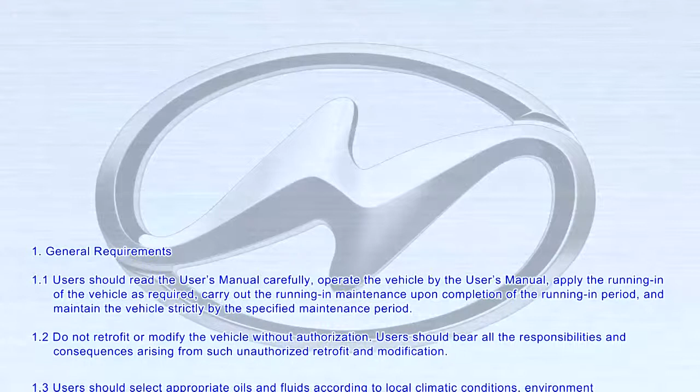period. 1.2. Do not retrofit or modify the vehicle without authorization. Users should bear all the responsibilities and consequences arising from such unauthorized retrofit and modification. 1.3. Users should select appropriate oils and fluids according to local climate, environment temperature, and road conditions. Conduct routine maintenance, elementary maintenance, and complete maintenance according to the intervals and the maintenance items required in the manual.

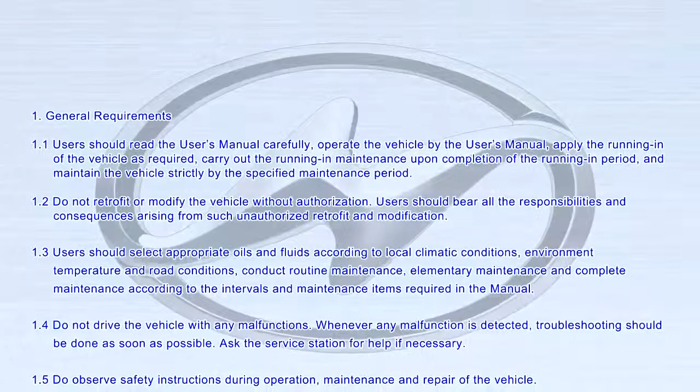1.4. Do not drive the vehicle with any malfunctions. Whenever any malfunction is detected, troubleshooting should be done as soon as possible. Ask the service station for help if necessary. 1.5. Do observe safety instructions during operation, maintenance, and repair of the vehicle.

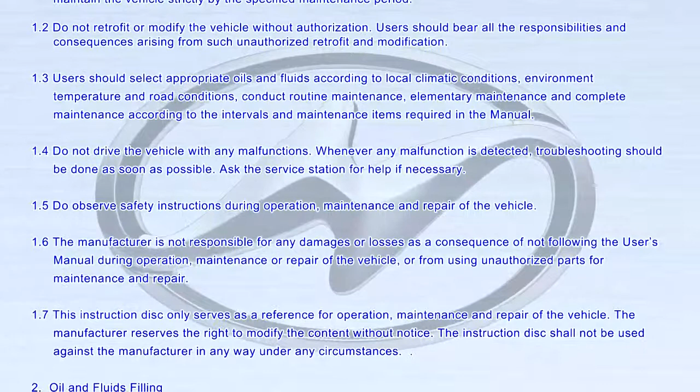1.6. The manufacturer is not responsible for any damages or losses as a consequence of not following the user's manual during operation, maintenance, or repair of the vehicle, or from using unauthorized parts for maintenance and repair. 1.7. This instruction disc only serves as a reference for operation, maintenance, and repair of the vehicle. The manufacturer reserves the right to modify the content without notice. The instruction disc should not be used against the manufacturer in any way under any circumstances.

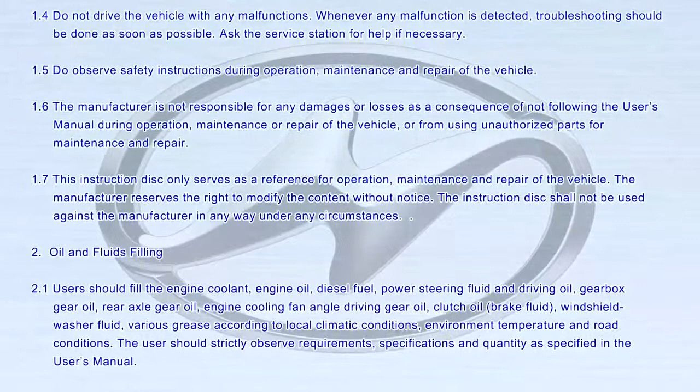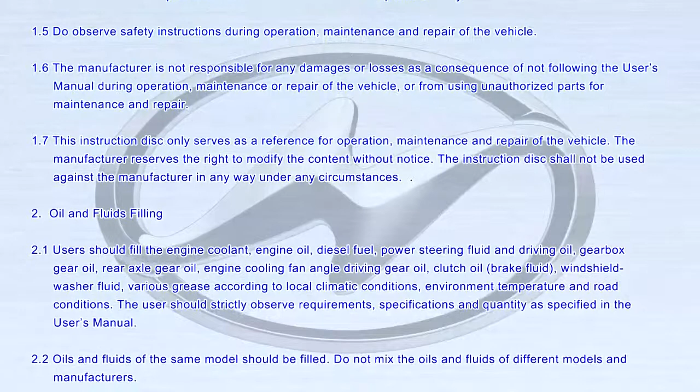2. Oil and fluids filling. 2.1. Users should fill the engine coolant, engine oil, diesel, power steering oil, gearbox oil, rear axle oil, engine cooling fan angle transmission oil, clutch oil, brake fluid, windshield washer fluid, various grease according to local climate, environment temperature, and road conditions. The user should strictly observe requirements, specifications, and quantity as specified in the user's manual.

2.2. Oils and fluids of the same model should be filled. Do not mix the oils and fluids of different models and manufacturers. 2.3. If water instead of specified coolant is used, a range of problems such as corrosion, damage to cylinder body, or reduced cooling effect may occur.

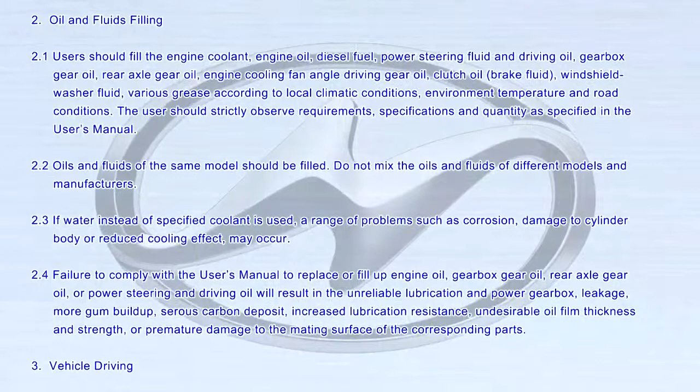2.4. Failure to comply with the user's manual to replace or fill up engine oil, gearbox oil, rear axle oil, or power steering oil will result in unreliable lubrication, leakage, more gum buildup, serious carbon deposit, increased lubrication resistance, undesirable oil film thickness and strength, or premature damage to the mating surface of the corresponding parts.

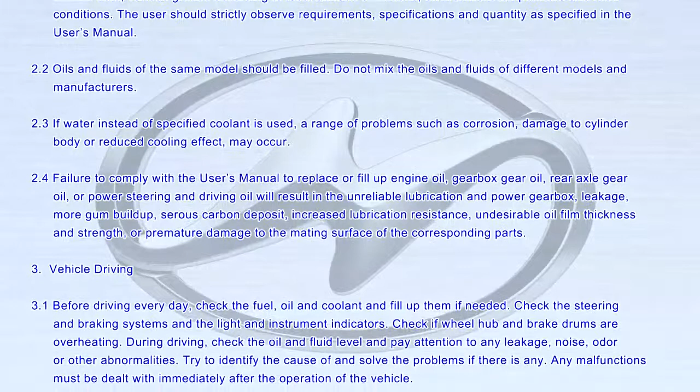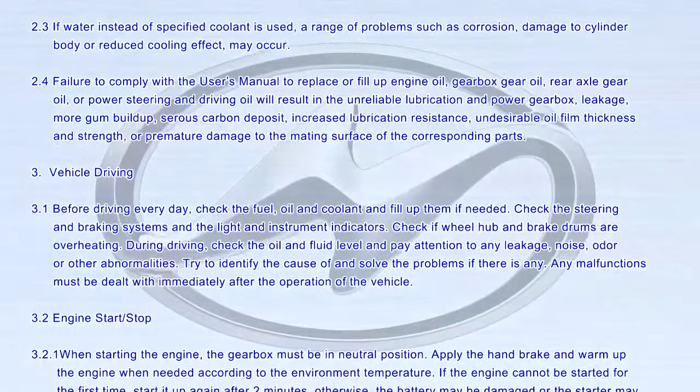3. Vehicle driving. 3.1. Before driving every day, check the fuel, oil, coolant, and fill them up if needed. Check the steering and braking systems, all the lights and instrument indicators. Check if wheel hubs and brake drums are overheating.

During driving, check the oil and fluid level and pay attention to any leakage, noise, or other abnormal phenomena. Try to identify the cause and solve the problems if there are any. Any malfunctions must be dealt with immediately after the operation of the vehicle. 3.2. Engine start and stop.

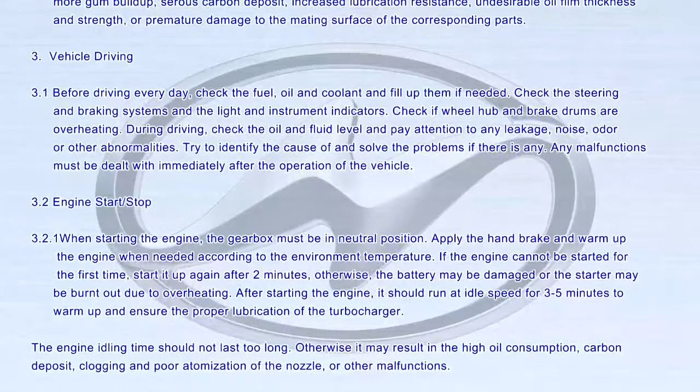3.2.1. When starting the engine, the gearbox must be in neutral position. Apply the handbrake and warm up the engine when needed, according to the environment temperature. If the engine cannot be started the first time, start it up again after 2 minutes. Otherwise, the battery may be damaged, or the starter may be burnt out due to overheating. After starting the engine, it should run at idle speed for 3 to 5 minutes to warm up and ensure the proper lubrication of the turbocharger.

The engine idle time should not last too long. Otherwise, it may result in high oil consumption, carbon deposit, clogging, and poor atomization of the nozzle or other malfunctions. 3.2.2. After driving at high speed and heavy load, the engine must run at idle speed for 3 to 5 minutes before shutting down, to dissipate the heat of emitting parts by the lubricant. 3.2.3. Attention! Do not force start an electronically controlled engine by towing the vehicle.

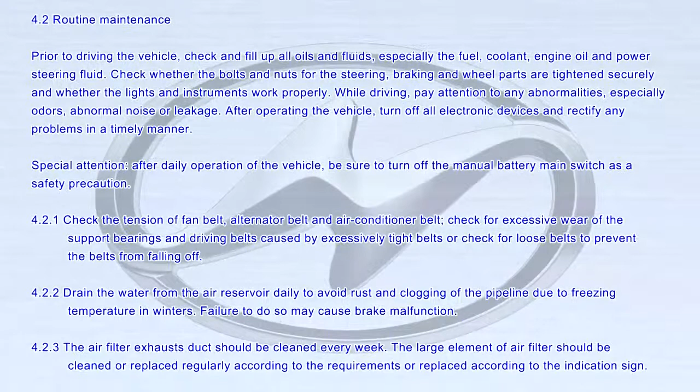While driving, pay attention to any abnormalities, especially bad smells, abnormal noise, or leakage. After operating the vehicle, turn off all electronic devices and rectify any problems in a timely manner. Special attention! After daily operation of the vehicle, be sure to turn off the manual battery main switch as a safety precaution.

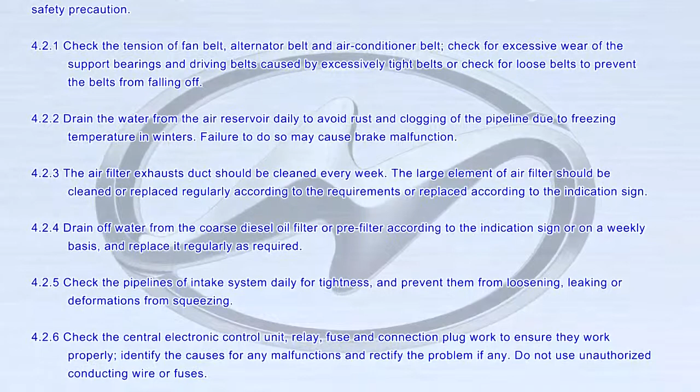4.2.1 Check the belt tension of the fan, alternator, and air conditioner. Check for wear of the support bearings and driving belts caused by excessive belt tightness, and check for loose belts to prevent the belts from falling off. 4.2.2 Drain the water from the air reservoir daily to avoid rust and clogging of the pipeline due to the freezing temperature in winters. Failure to do so may cause brake malfunction.

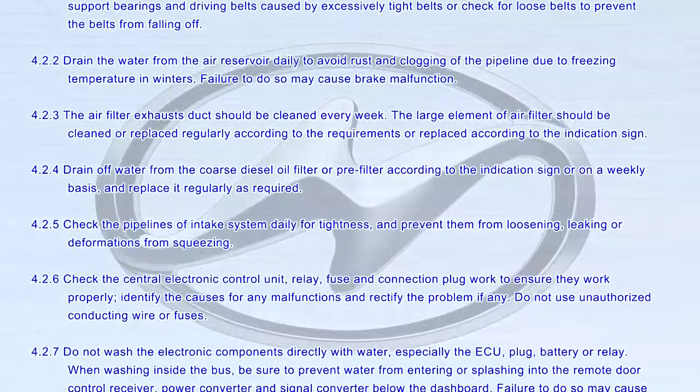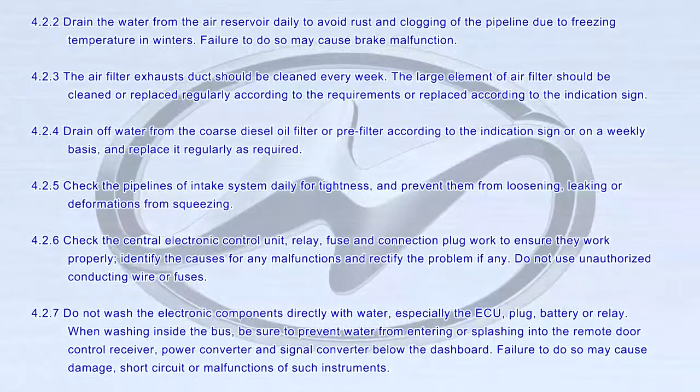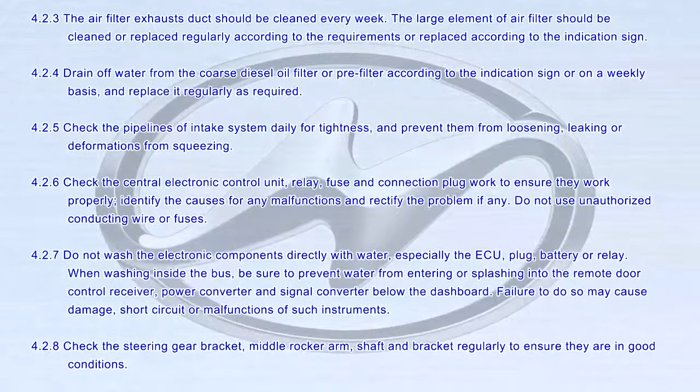4.2.3 The air filter exhaust duct should be cleaned every week. The large elements of the air filter should be cleaned or replaced regularly according to the indication sign. 4.2.4 Drain the water from the diesel filter or pre-filter according to the indication sign, or on a weekly basis, and replace it regularly as required. 4.2.5 Check the pipelines of the intake system daily for tightness and prevent them from loosening, leaking, or deformations from squeezing.

4.2.6 Check the central electronic control unit, relay, fuse, and connection plug to ensure they work properly. Identify the causes for any malfunctions and rectify the problem if any. Do not use unauthorized conducting wire or fuses. 4.2.7 Do not wash the electronic devices directly with water, especially the ECU, plug, battery, or relay.

When washing inside the bus, be sure to prevent water from entering or splashing into the remote door control receiver, power converter, and signal converter below the dashboard. Failure to do so may cause damage, short circuit, or malfunctions of the above instruments. 4.2.8 Check the steering gear bracket, middle rocker arm, shaft and bracket regularly to ensure they are in good condition. 4.2.9 Check the connections between the engine bearing and drive shaft to the flange regularly for any loose parts.

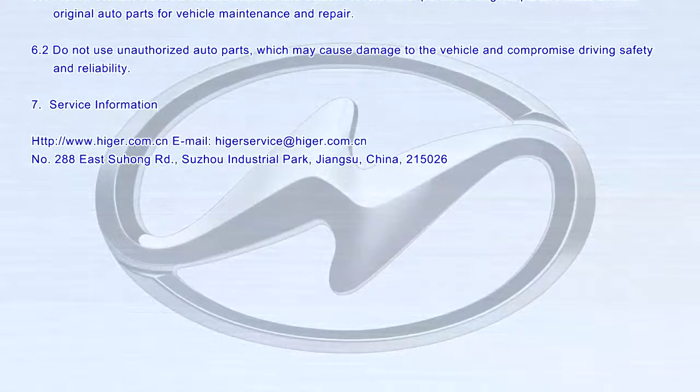5.7 Before inspecting the electronically controlled fuel system, first remove the ground wire of the battery. 5.8 Do not carry out a pressure relief test by cutting off the high pressure oil line of the electronically controlled engine. Otherwise, the high pressure oil may harm people. 6. Purchase and use of auto parts. 6.1 Please contact the local service stations and dealers of Higer to purchase original parts. Please use the original auto parts for vehicle maintenance and repair. 6.2 Do not use unauthorized auto parts, which may cause damage to the vehicle and compromise driving safety and reliability.

7. Service information. Our website is www.higer.com.cn. Our email address is higerservice@higer.com.cm. Our contact address: number 288 East Suhong Road, Suzhou Industrial Park, Jiangsu Province, China. Zip code 215026.